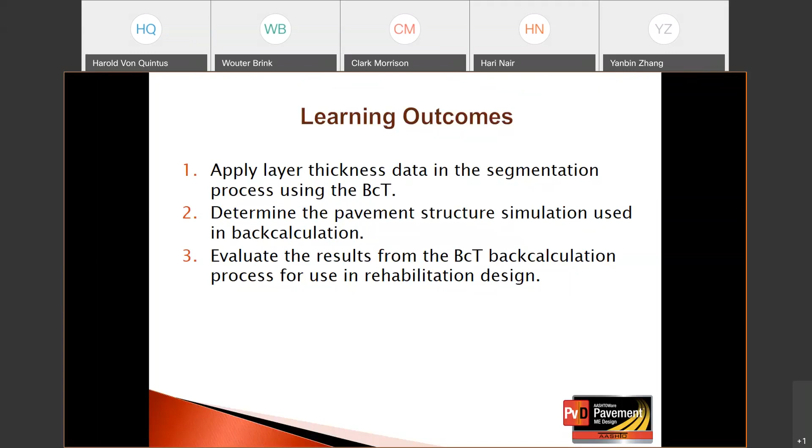So, starting with the introduction of the BCT, this is a listing of the 9 important enhancements that were made. These are included in version 1.06, which is available. We're going to go through each of these 9, and in addition, some additional ones that are mainly for the users in terms of display screens and that type of information. But we'll go through each of these 9 on a typical example for doing the back calculation.

The one additional item I would like to call your attention to is that we do have some additional items and features that are being added to the BCT, and those will be available in version 1.1, which will be available in a couple of weeks to the users. So version 1.06 is currently available, and 1.1, which will include a few more enhancements or improvements, will be available shortly.

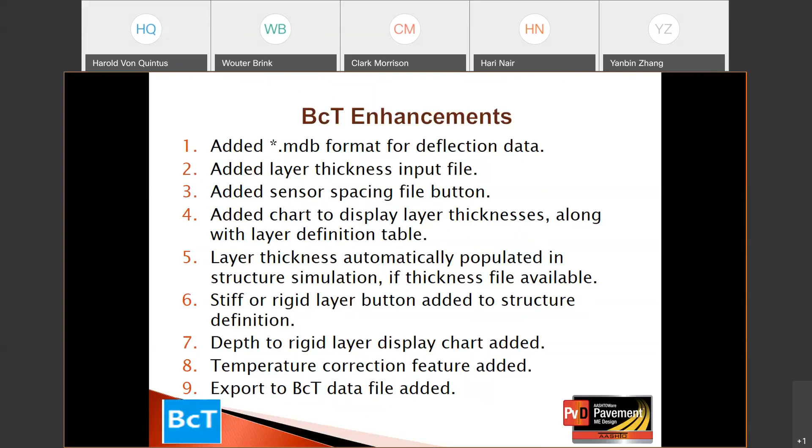There is also information from previous versions, with the initial version, that has to do with the EverCalc program. EverCalc is still the main engine of the back calculation tool, and we'd like to again give thanks to the Washington DOT that allowed AASHTOWare to use EverCalc as part of the Pavement ME tools that can be used.

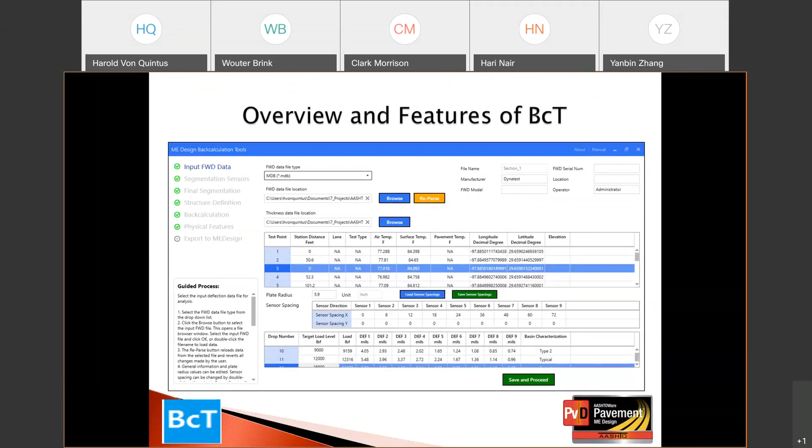Personally, I think EverCalc was an excellent tool, and it's more production oriented, and that's one of the main reasons why it was requested for use regarding rehabilitation design and pavement analysis in accordance with the Pavement ME design software as a support tool. So you access it in the same way. We do have quite a few users that have been using it, which we think is a good thing.

So moving forward now, in terms of the initial screen, before we get into the demonstration, I wanted to go over the guided process, and that's what's shown on the lower left-hand side of the screen. That guided process remains the same in version 1.06 as well as version 1.1. The only thing that has changed, for those that have used the BCT in the past, there used to be 2 other screens related to segmentation. One was defined as preliminary, another one was defined as statistical segmentation.

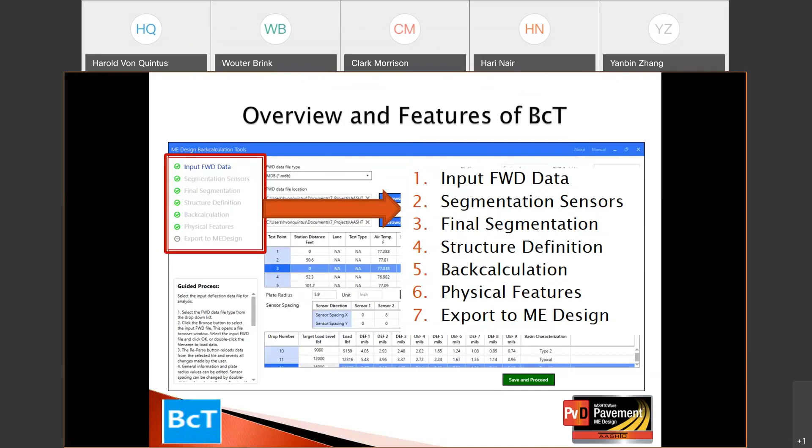Those are now all embedded under one screen, which is titled Final Segmentation. And we will get into that shortly. So those two screens are now all combined into the final segmentation screen. So with that, what I'd like to do now is get into an actual demo and go through an actual problem to demonstrate the enhancements that were made to the software. So I'm going to bring the software up in terms of the main screen.

And Wouter, before I get into that, you can see the screen adequately, is that correct? Yeah, it looks okay on my end. Okay, great. Just wanted to verify that.

Okay, so same screen that has always been there. The only additional item was the thickness data file. Now users have the ability to enter layer thickness data, which we'll get into. We'll upload a file and then go into the details of it. There is a thickness file template on the website. It's a very simplistic template, and it's just a .csv file that is compatible with importing thickness data into the BCT.

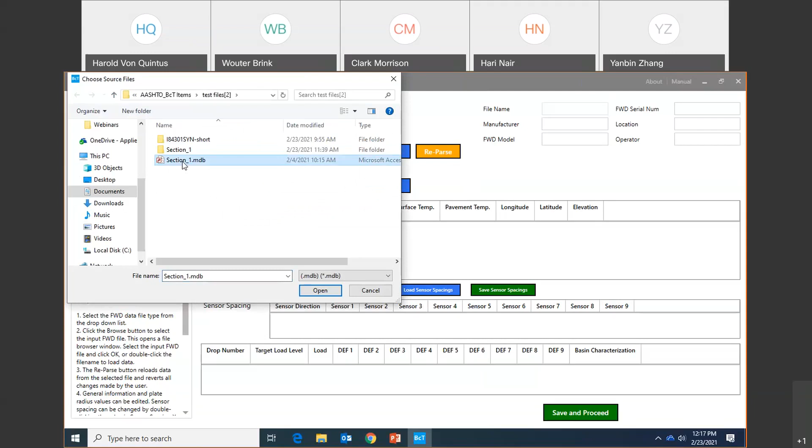And this is an actual project that was done. And so I'm going to upload that. And you can see that basically just about everything remains the same on the file.

Before I get into the thickness files, as a reminder, once you have each of your test points that have to do with different drop heights, we should enter the target load. That hasn't changed. So in real time, I'm going to add the 4 target loads that were used for this example. And once they're done for one station, those target loads are applicable to any stations.

The other thing that I'm going to do for the example, for 2 reasons. One, this original file did not have pavement temperatures. One of the enhancements that was added at the request of multiple users was to be able to use a standardized temperature and normalize the deflections to the standardized temperature so that all back calculation values are consistent to one temperature. Since this did not have any temperatures, for about 12 of these sites, I'm going to enter 80 degrees pavement temperatures, which is between the air temperature and the surface temperature.

Now what I'm going to do is enter the thickness file. And so the thickness file is the same way. I have this, what I'm calling ground penetrating radar. This is a key item that, in my opinion, will benefit many state agencies as well as consultants, because a lot of agencies and consultants are getting confident in the GPR and its use. I am also one of those individuals. And so using GPR data where you're measuring layer thicknesses along a route now can be considered in the BCT tool.

The one item I want to make sure everyone understands is the BCT does not do the analysis of the GPR data to determine layer thickness. That has to be done separate from, independent of, or external to the BCT. Once the thicknesses are available, they can be incorporated in that thickness template, and then uploaded to the BCT. And so that gives the user, the pavement designer, a lot of information on layer thickness within the rehabilitation project. And I'll come back to that on a couple of other screens because I think it's very important.

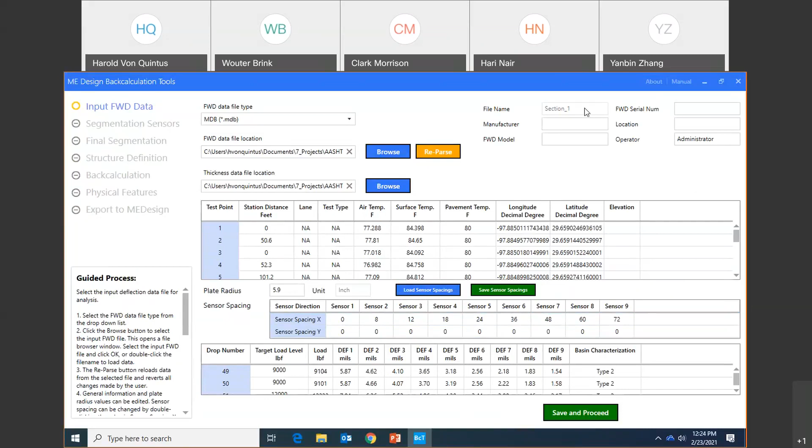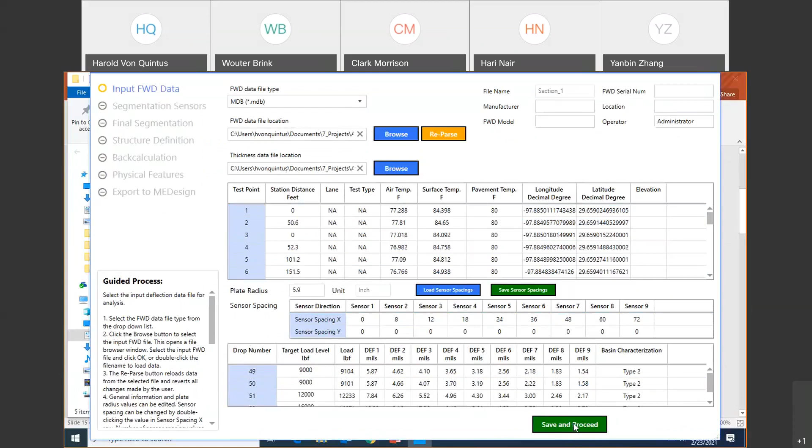That was another user request because they were having to enter these manually every time they restart a project. And so that's the reason the save sensor spacing and load sensor spacing buttons were added, again, more for a production basis for using the software. Okay. So we've basically gone through each of the different screens and added features initially. So I'm going to do a save and proceed and go to the next screen.

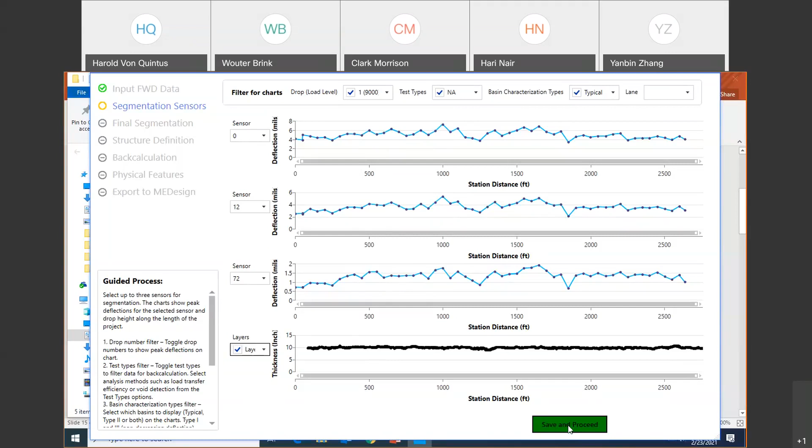As a reminder, if you have a lot of data, like with GPR, there'll be a little delay moving from screen to screen because there are a lot more lines of data. And we also have quite a few deflection points within this segment of roadway. So the more data points you have, you may notice maybe half a second to a second of delay. Nothing significant, but it will not be immediate.

So this is the final segmentation screen, and it also works identically to the previous versions. The one thing I'd like to point out is that the preliminary segmentation and the statistical segmentation are now displayed on the final segmentation screen. The user can click on each one related to the deflection data: the preliminary, which is based on the area method from the 1993 AASHTO Design Guide, or the statistical method explained in the user manual, which looks at whether one segment is statistically different than the others using the moving average of the number of deflection points.

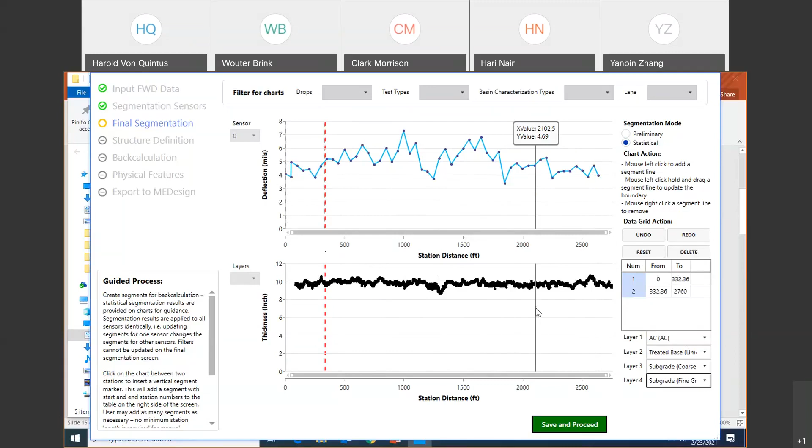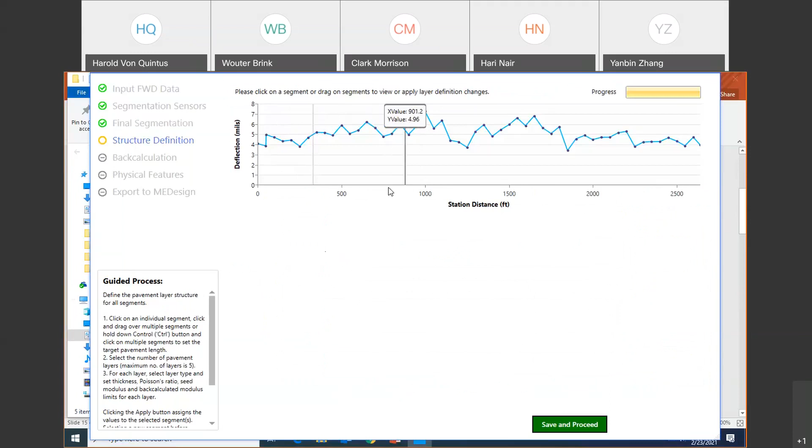So I'm going to save and proceed. And now I'm into the structure definition simulation screen. This screen is the same, but there are added features. So we have two segments shown by the boundaries between segment 1 and 2. So I left click within segment 1, just like we did on previous versions.

So this comes up and we have the pavement structure, the average layer thicknesses, and the different layers, layer 1, 2, 3, 4, with the average thicknesses that come from the layer thickness file within these boundaries. So these thicknesses represent the average thicknesses from the layer thickness file for the user-defined segment boundary conditions.

And so this will be 4. I'm going to leave these 4 layers as I defined them within the final segmentation screen. So right now I'm not going to change anything on this screen, and I'm going to go to apply. And now you notice that turns green because I just accepted it.

Now I left clicked on the other part. These now are the layer structure that came up, the different layers and the average thicknesses for each of these layers for this segment, between the start of this segment and the ending station location. The one thing I'm going to do, though, is change layer 2, and this is 10.24. I'm going to change the layer and say now this is an aggregate base that has not been stabilized. And so I'm going to click on that.

I'm going to turn it off though. We're still going to back calculate at whatever temperature was in the FWD input file. So, the sensor locations, and I'm just going to hit back calculate. And now it's going to go through its back calculation. So for all of that, using the average layer thicknesses for those 2 segments, it's complete. I'm going to hit OK.

And now I'm going to go to the segment selection. I'm going to look at the results for that first segment. If I click on that, this shows me the layer modulus chart as a function of distance. And the lower chart shows me the root mean squared error for each of those points as a function of distance down the road.

I'm going to turn on the logarithmic scale, and then I'm just going to quickly look at the AC first. And you can see that's for the asphalt. I can then look at the treated base. You can see that's probably treated because it's well above 100 KSI. And then I'm going to look at the coarse-grained subgrade, the embankment, which has a very high modulus.

And then I'm going to look at the subgrade modulus within that segment. The root mean squared error chart shows we have 1 point that's above 5% for this segment. So I'm going to look at the other segment now, and do basically the same thing. You can see we have a couple of points that have very high root mean squared errors. I would not have confidence in those points.

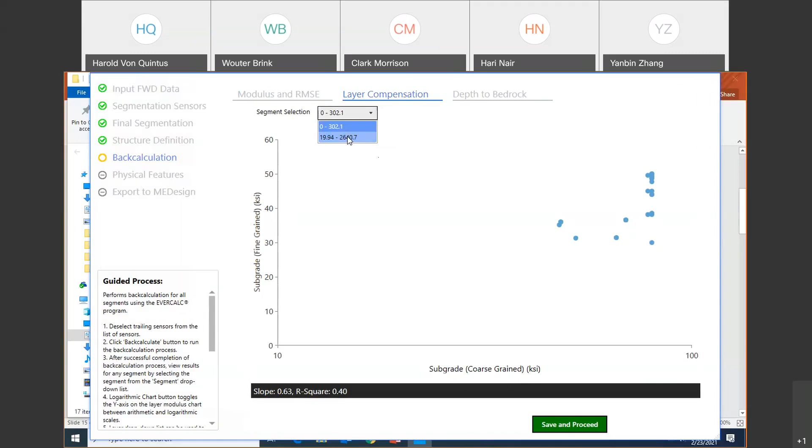So remember, we're looking for highly related unbound layers that are inversely proportional, because that's a sign that we're in an area where the increase of one layer is simply reducing the other layer modulus, and they're being inversely proportional, which typically doesn't happen in the field.

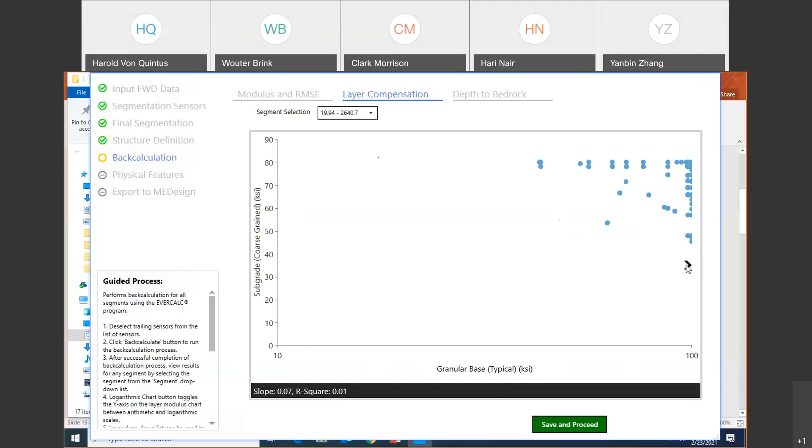This is the other segment, and remember here, this is now the base and the subgrade. They're not related, but again, on the granular base, we're hitting the boundary condition. So I'm going to look at now the two subgrade layers, and again, they're not related, but we're hitting the boundary condition. Oh, and then the depth of bedrock.

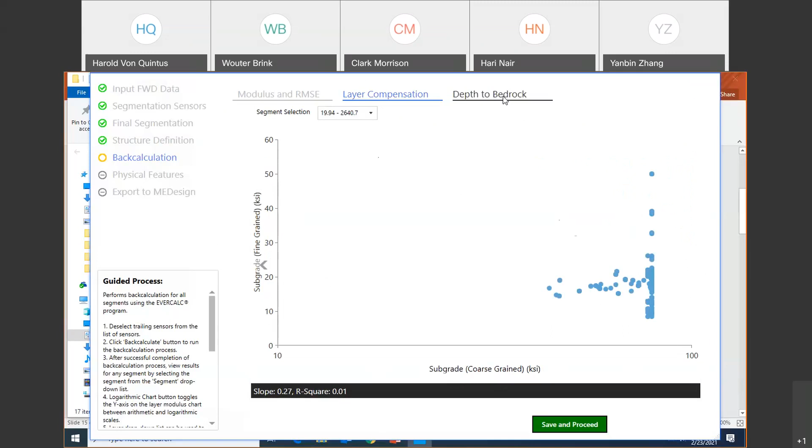This is the other item that was included, our depth to bedrock. And we had the depth to bedrock in the second segment. Since we had that check, this is the tab to look at the depth to bedrock and how that varies along that segment. And you can see that it's very deep. I initially assumed 120 inches, and just about all the values are much greater than that. So in actuality, we could simulate, or probably should simulate, this segment as an area without bedrock.

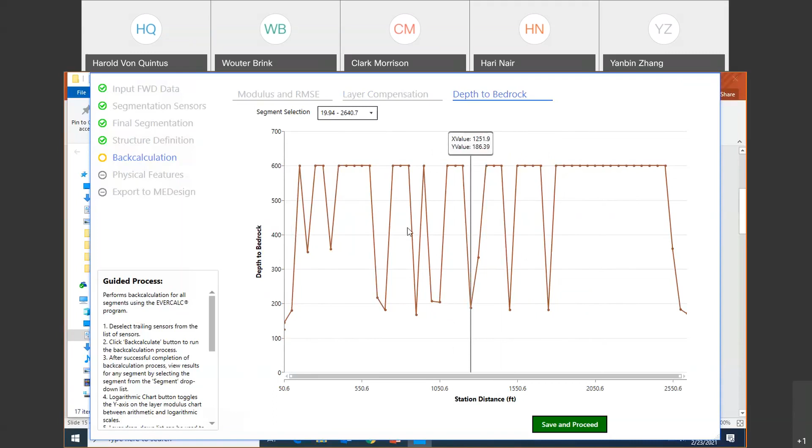And so what I'm going to do now, I'm going to go back to here. What I want to do is look at the modulus values and then come back with a temperature correction and look at those same values. So I want to save and proceed this section, but before I do that, I'm going to enter 5%. It's the maximum the user manual suggests the user enters, and then hit update, and it removes those data points where the root mean squared was greater than 5%. And then I'll hit save and proceed.

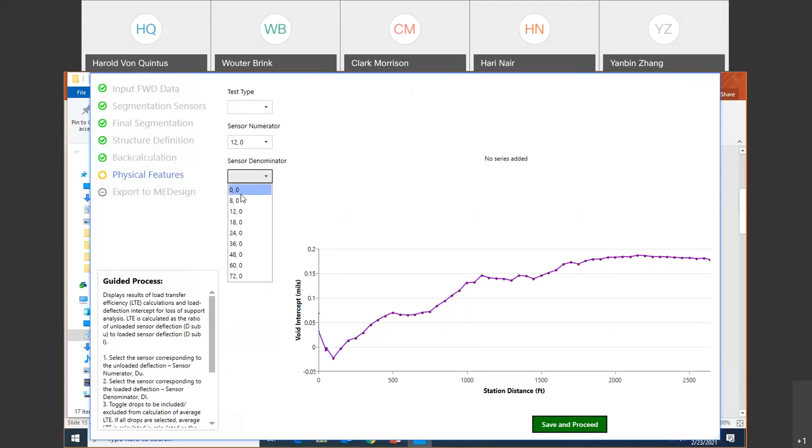The physical feature screen really hasn't changed. It's all the same. This data file did not have any transverse cracks, load transfer data. So we don't really have load transfer efficiencies being measured with the deflection data. Basically, it gets entered the same way. The numerator would be whatever deflection is on the other side of the crack, and the denominator is where the load plate is on the opposite side of the crack, or however the agency is using the deflection basins to measure load transfer efficiency. As I noted, load transfer efficiency does not exist in this deflection data file, so it's not going to be used.

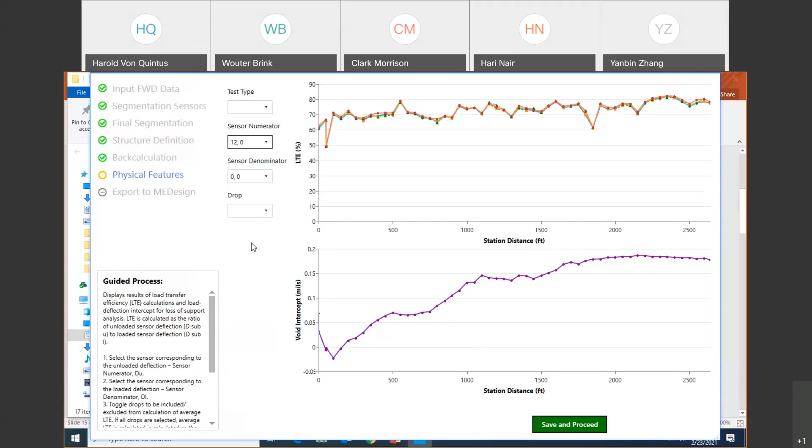And then this shows the different drops. So I'm just going to leave it as is, and I'll hit save and proceed. What I want to look at initially is the first one. We have about 620 KSI. The lime treated base about 140. The coarse grain soil is about 73 KSI and the subgrade 42. So you can see the coefficient of variation is very low here. That indicates we had very low variation, which is a good thing.

I'm now going to go to the second segment, where I changed lime treated to a granular base. And you can see we still have, from segment 0 to 1, about 900 KSI for the AC. We still got a pretty high modulus for the aggregate base, pretty high for the coarse grain soil or the embankment. What's defined as an embankment is a coarse grain material, and then the fine grain, and then the bedrock. Again, very low coefficients of variation, which means the deflections were relatively uniform, and we probably have fairly uniform thicknesses within each of the segments.

And so before I get into these files here, I'll come back to these. What I want to do now is go back to our back calculation screen. I'm going to go backwards, and I'm going to come into what we defined as temperature correction, and I want to turn it on. And so now we're going to back calculate and normalize everything back to 68 degrees. Remember, the air temperature is around 75. The surface temperature was around 85. And for the first 12 points, I entered 80 degrees as the average pavement temperature, and the pavement temperature would be mid-depth in the asphalt layer. And so with this, I'm just going to do back calculate.

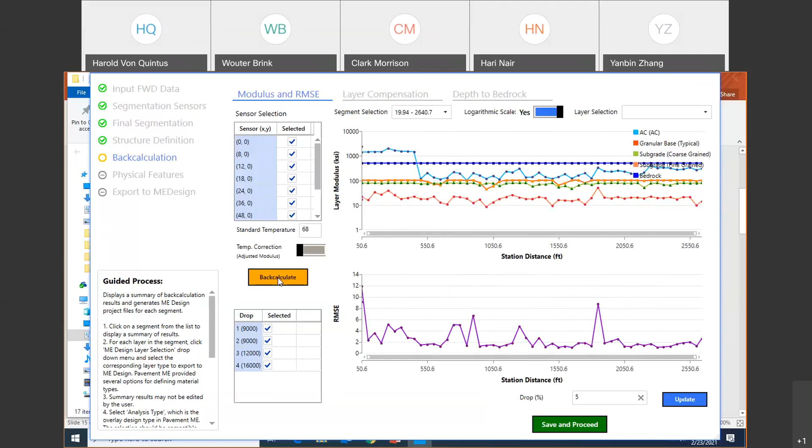Okay, so I'm going to come back now to without using the normalized temperature screen. And so we should come back to exactly what we showed previously, about 600 to 700 KSI for the asphalt, and then the others. But now I want to go back to the structure definition file.

Since we have a deep, stiff layer here, a lot deeper, I'm going to turn off the stiff layer now and go back to only 4 layers, and have 0. And if you remember, we were hitting the boundary. So I'm going to up this for layer 2, which we really considered a stabilized layer. For both of these layers, I'm going to increase the upper modulus values, and hit apply.

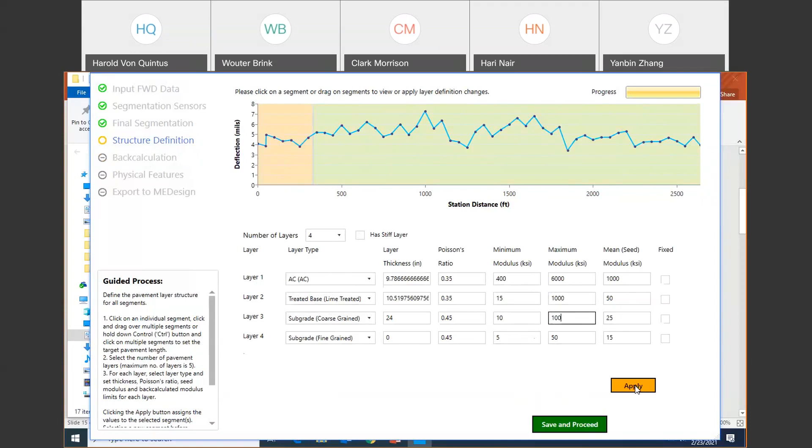I'm going to go back. This one's already up to 1,000 anyway, because we defined it as stabilized. And I'm going to set this one to 100 like on the previous one, but leave it at that. Then I'm going to hit apply again, and save and proceed. I'm going to leave the temperature turned off, hit back calculate again, hit OK. And then I want to look at each to see what happened to my root mean squared error.

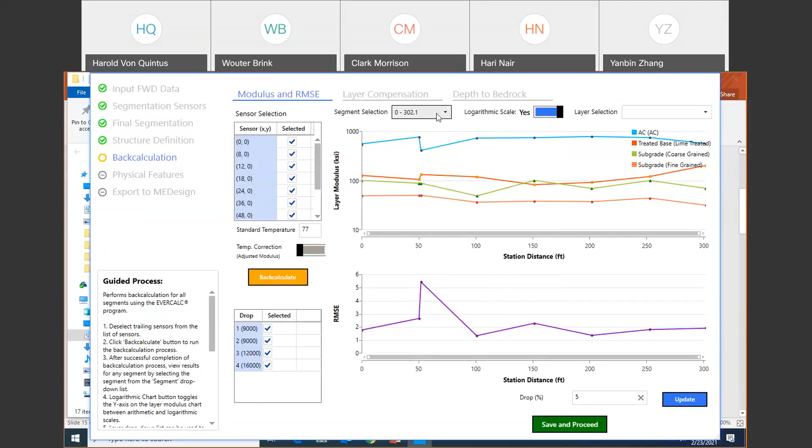As you see for segment 1, everything is about the same because we didn't simulate a depth to rigid layer. I'm then going to go to segment 2. As you can see, now we have only really one point that's above 5%. Let me do this. Yeah, they didn't change. So all the other points now, with removing that rigid layer, we got a lot better fit to our measured deflection.

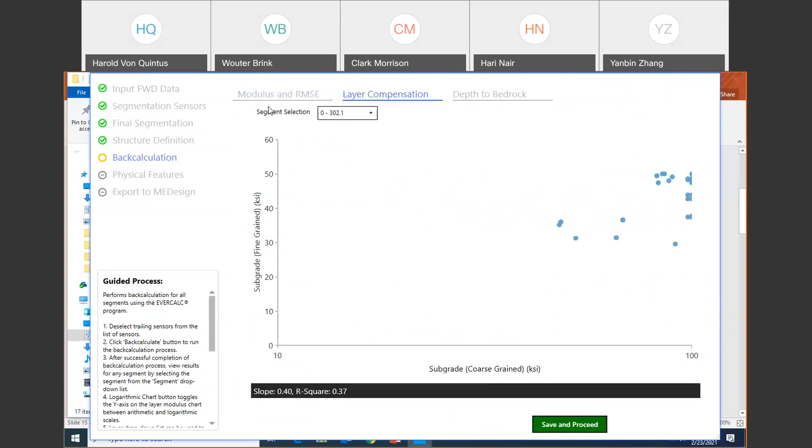So I'm going to remove that 1 or 2 data points that are above 5%. We got very good root mean squared error; most of them are less than 2%. And so I'm going to go back and just look at our screens. They're basically the same. So I'm going to go back and do save and proceed, because there's one other feature that was added I want to show the users. So here's segment 1.

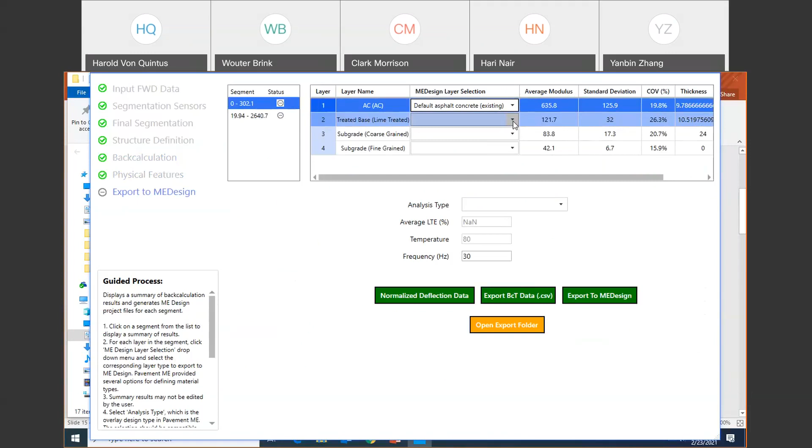This is an asphalt concrete, and it's still 635 KSI at about 80 to 85 degrees Fahrenheit. This was what we called the lime fly ash for segment 1. This is now an A-1-b for the coarse grained embankment. And then our subgrade was an A-6 at 42 KSI. Still, coefficients of variation are very good.

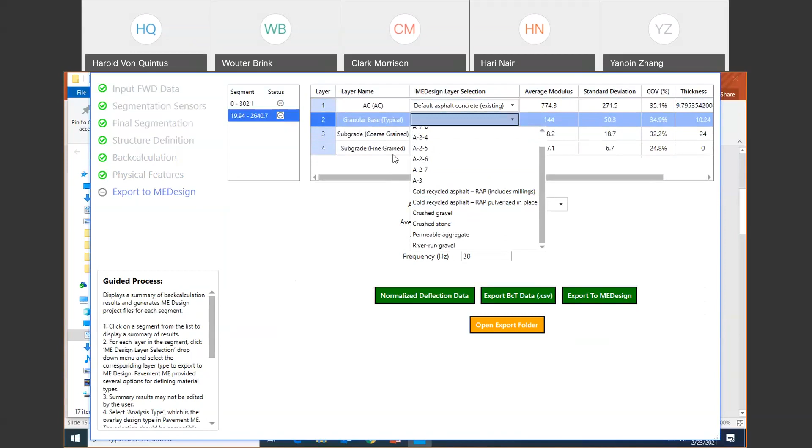Here's the layer thicknesses. Go to layer 2, segment 2. This is now the asphalt concrete at 773, about the same as segment 1. Very good coefficient of variation. Granular base. This granular base, you can see that it's not stabilized, but it has very high value. So I'm still just going to call it a crushed stone, but this lane is probably a lime stabilized aggregate base also, because it's got about 144 KSI. But the coefficient of variation is good.

I'm going to call my embankment still an A-1-b, and then the subgrade as an A-6, and this is all good. Very low coefficients of variation. Here's my average moduli for each of the layers.

So what I'm going to now briefly go through is we have these other two features that were added. The reason these were added, some users wanted to normalize the data to their specific target drop height, so that they do not have deflections where the drop height or the drop load is varying. They want to normalize it to their target load.

This other button is export the BCT data, and it's converted into a .csv file to allow users to easily evaluate the results from the back calculation process for each of the segments. So if I click on, let's say, normalized deflection data, and then the export, and I'll show where the normalized deflection data is, hit export.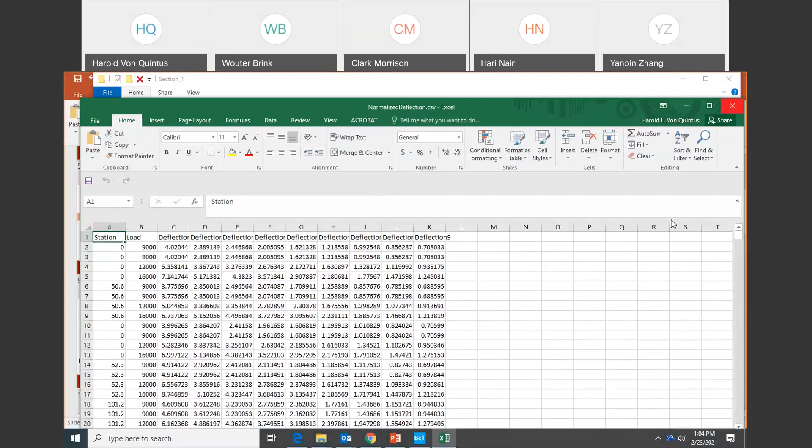Now I'm going to close this one and go into the EverCalc export. You can see we have S1 and there is an S2 because this is segment 2. Section 1, segment 1, section 1, segment 2. So I can first look at segment 1. This shows me the stations, the actual load levels, the modulus of layers 1, 2, 3, and 4. What's shown here is the total depth of the pavement structure, and then the root mean squared error.

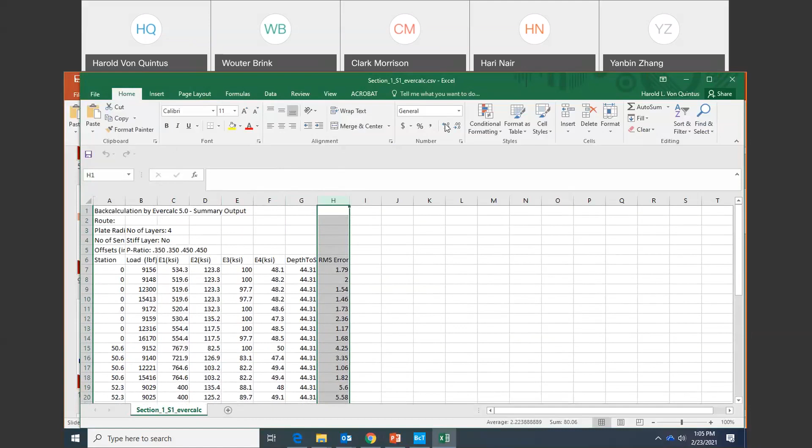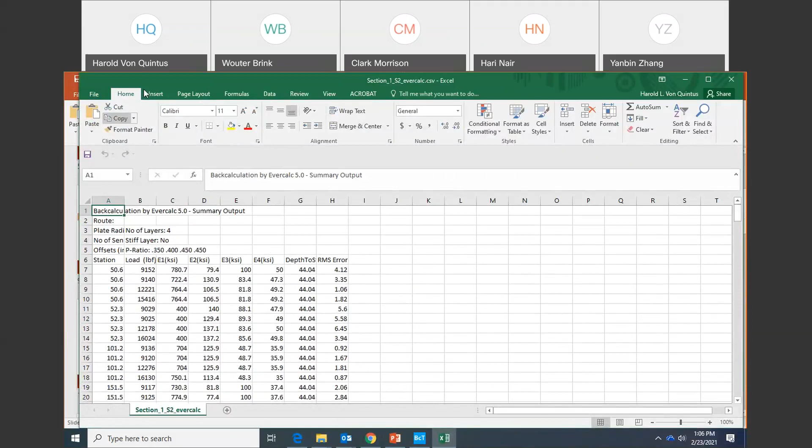Now the user can go through all the values in segment 1, prepare whatever plots, look at the data differently, whatever the user would like to do as part of their rehabilitation design process. So I'm going to get out of that one and show segment 2. Same thing is shown for this segment. So all of that is basically the same. Then I'm going to get back to the BCT.

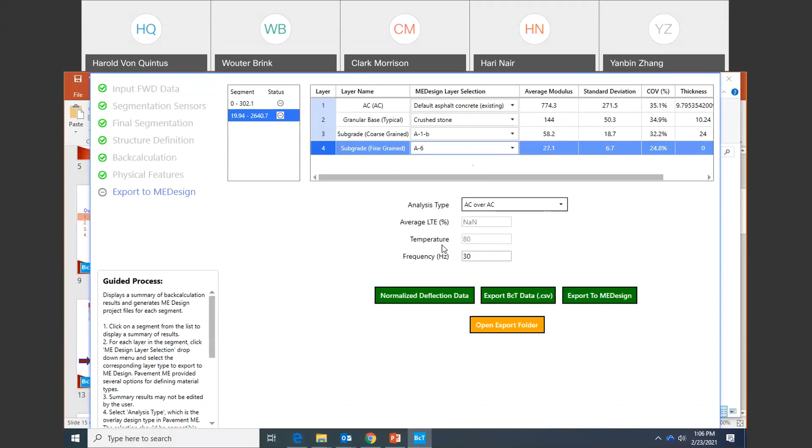The export to ME design is identical to before, but you can see I just made an error. The program told me I forgot about the analysis type. Our analysis, we're going to use this for rehab, is asphalt overlay over asphalt. The other thing I want to mention is this temperature: because we had a temperature of 80 in the deflection file, now 80 comes up. If we had NA, this would be NA or 0, and the user would have to populate this in the Pavement ME design file.

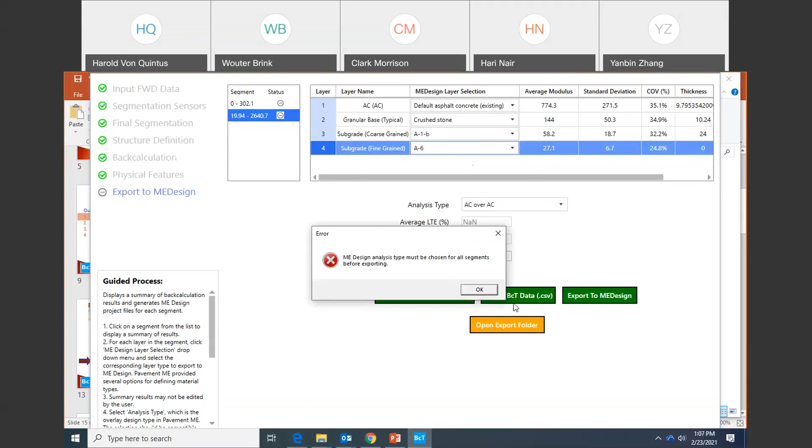So I'll do export for segment 1. Both of the segments are now populated. I'm going to hit go, and it's been populated to the screen. So I can go to that export button, and here's my ME design project files, and here are my 2 segments that have all been populated.

And so now this kind of concludes the demo for this webinar in terms of using the new enhancements, improved features for Pavement ME. And for webinar 4, we're going to pick up where we left off here in terms of designing an overlay for an existing pavement structure that has multiple asphalt overlays.

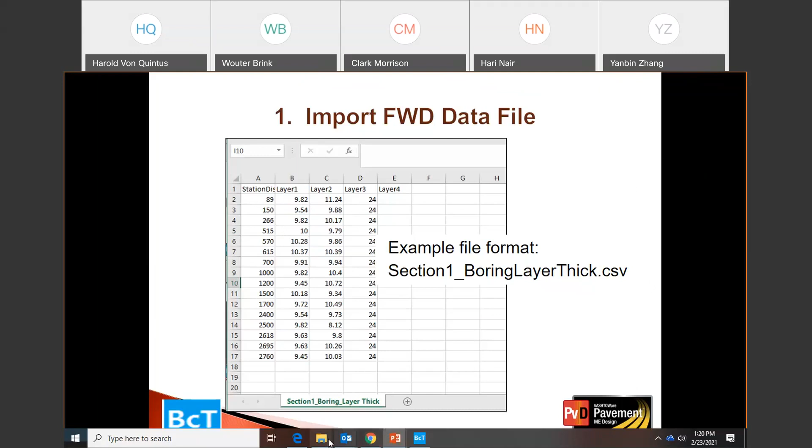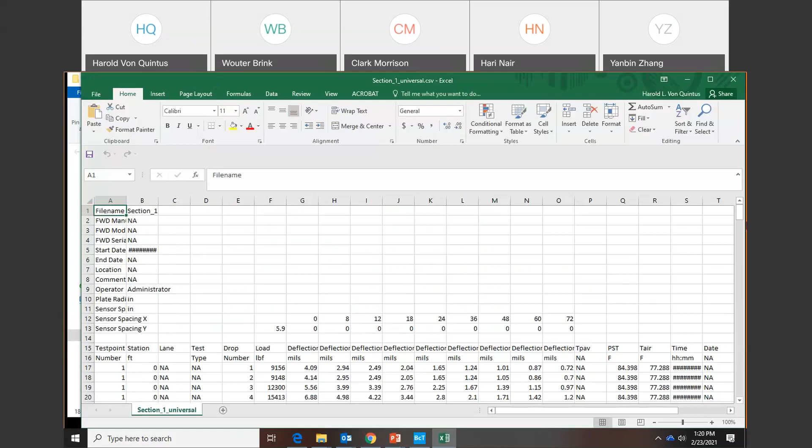I did have a file structure, and let me see if I can find it and bring it up. Here we go. No, that's the wrong one. I'm almost sure. You saved it in test files 1? Yeah. It's in here, and here we go, GPR layer thickness files. Here's the layer thickness file for GPR.

We got these files from a specific user. The user took all the GPR data, determined what the thickness is on a per 100-foot basis. And then every thickness for the surface, the base, this base, and then the embankment layer are entered. So this is a typical GPR file. It would be very large, a lot of lines, because it's a lot of data.

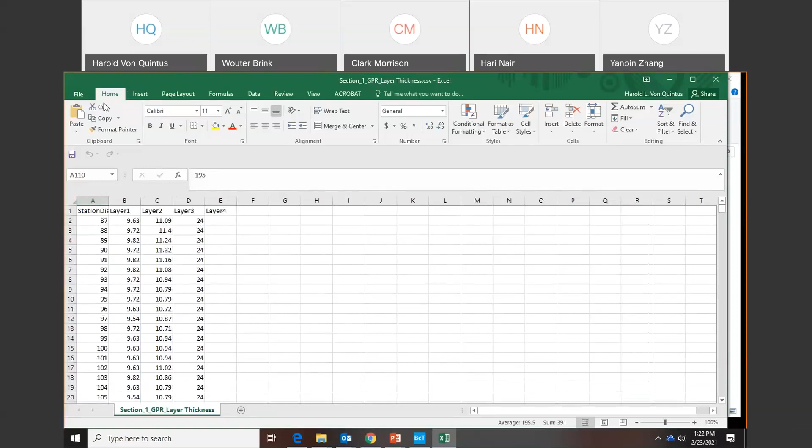But again, I want to emphasize, the BCT does not do the interpretation of the GPR data. That has to be done externally. The thicknesses derived from that GPR data are then included in this thickness template, and then those can be imported into the Pavement ME thickness file. So I want to make sure everyone understands that. Hopefully that answered the question.

Yeah, I think so. And there's also a sample file on the ME Design website under the BCT back calculation tool. Yes, there is. Next question is, what is your maximum recommended value for coefficient of variation? Yeah, that's a good point. I didn't mention it. The user guide covers that specifically. That's also dependent upon the use. I try to get that coefficient of variation below 50%, certainly below about 75%.

With thinner layers, typically that coefficient of variation is going to go up. If you have a lot of variation in thickness along a project or segment, the coefficient of variation is going to increase. The GPR files I gave as the example were very good. The project was built relatively uniformly, so we did not see through the borings or the GPR data a lot of variation in thicknesses. It's a pretty uniform project.